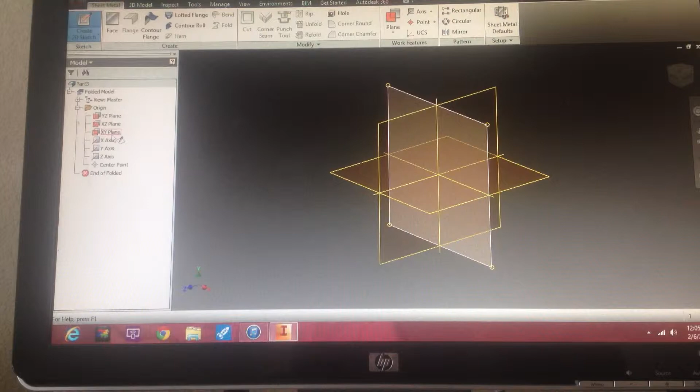Click on sheet metal. We're going to create a sketch. We're going to create a 2D sketch. I'm going to make it on this plane. There's the YZ plane, the XZ plane, and then the XY plane. So I'm going to pick the XY plane, so we'll be looking like what the front view would be.

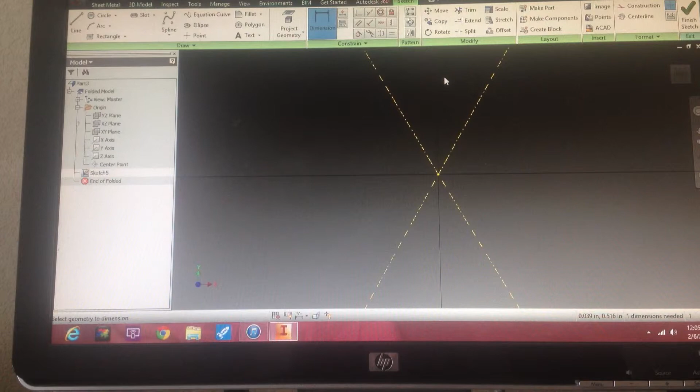I'm going to start with a rectangle. Come in and grab this one that has the center point for the rectangle. Now it's constrained to the center, and whenever you see these green lines, we need to make them look blue. So I'm going to make a part that is 36. And then as you can see, it kind of expanded both of them relative to what that size was. I'm going to make a 36 by 36 starting piece. You can come over here and click on that dimension so it'll pick it up.

A lot of things you can do with this right now. I'm going to just try to go through and show a quick basic function. I'll come back with another video to do more. So we've got a 36 by 36 inch piece. We want to make it into sheet metal. So we're going to have to go to the face command.

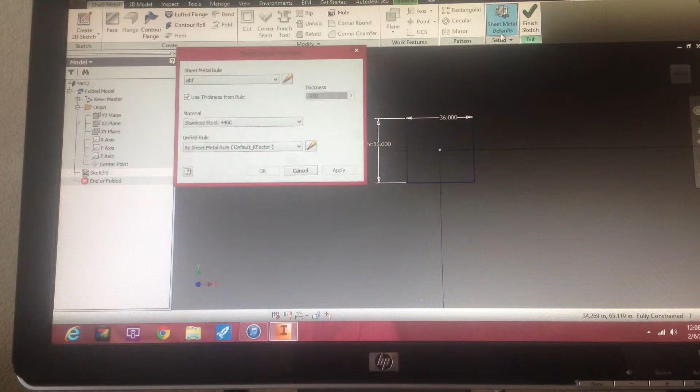Your sheet metal defaults here will let you change the different thicknesses. Right now we're going to use .059, 16 gauge stainless steel. So I'm going to put the face command. It knows that's the only place it could go. Apply. So now we basically have the base part of our sheet metal component.

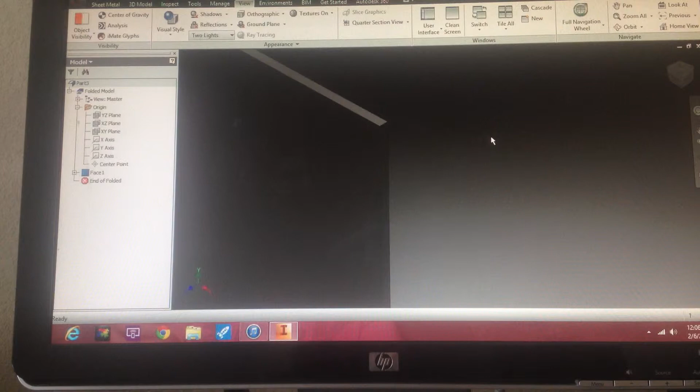One of the things I like to try to do is in the view here, go to visual styles, take the shaded with edges. You can kind of see the part a little bit better. The guy who taught me how to do this, Clint, kind of gave me that idea.

So the next part I want to do is I want to have 3-inch flanges coming up all the way around. So we're going to go into the flange command, and you can grab either side of it. You can grab the back side, the flange will go down, or the top side, the flange will come up. We want to come up towards us. So I'm going to grab the top part. I want to come in here and make this 3 inches.

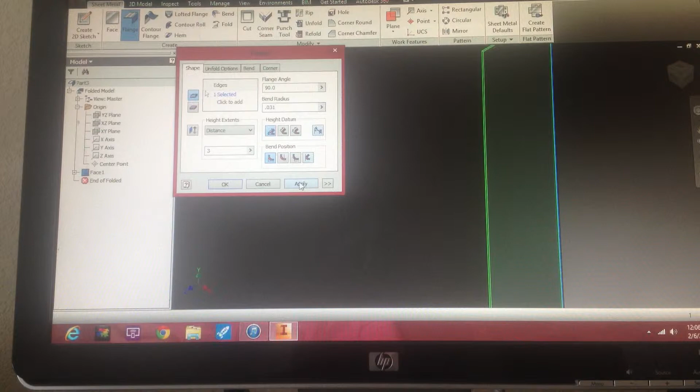And the bend radius, that's something that's up to your shop. I'm going to use a 1/32 radius. There's other functions that are inside of here. One of the things that's most important is in the corner. We'll see right now why this will become important, because we want to make nice, sharp, tight corners. So we've picked that. So now I'm going to pick this one too.

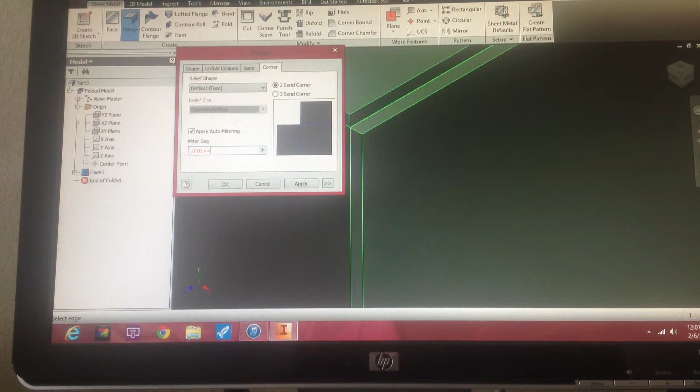So they've come up right here, and as you can see right now, I'm trying to get in here with a really nice, tight corner. So we're going to take a 0.001 gap size. We're going to select all 3 sides, then do apply. So again, if we come in here, you can see nice, tight corners, good for welding.

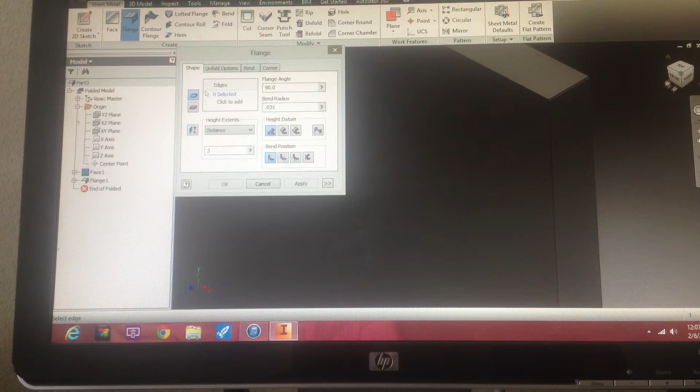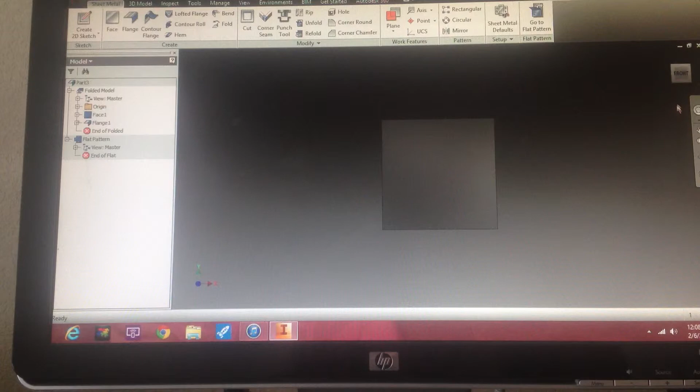I'm going to go and make a flat of the part. So we're going to come to our front view and make a flat pattern, and you can see nice tight corners, good for the welders and the brake guy. Go back to the folded part. I kind of like to look at it, for you guys to see it, in this kind of 3D isometric view.

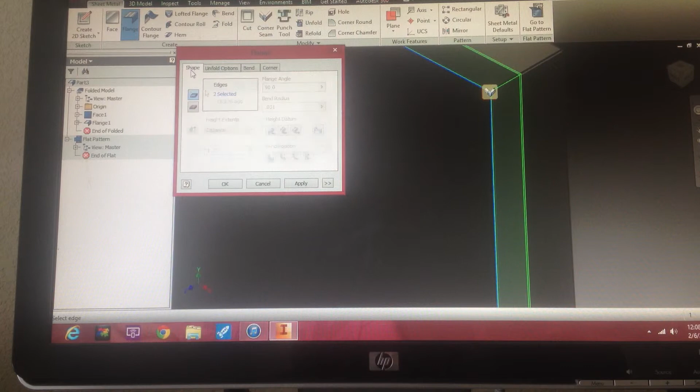Now I'm going to go and I'm going to put some flanges around the outside. I'm going to put 1.250 flanges. And now this time I'm going to have them bend towards us. Go select edges. And as you can see, we have this command, which is very important to have it on, apply auto mitering. So it's come up with a nice, good bend right there. And we'll do apply.

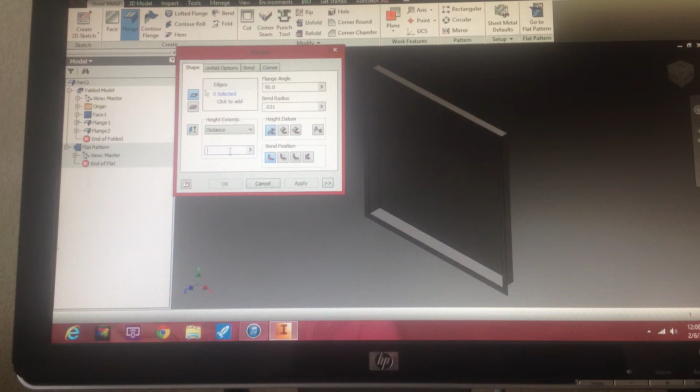And then the last part of this box that we're going to have is we're going to have a return flange on the outside. We're going to make it a 1/2 inch return flange. So I'm going to pick the far side. So if I pick the top, it would come up towards us. I'm going to pick the bottom, so it'll go away from us.

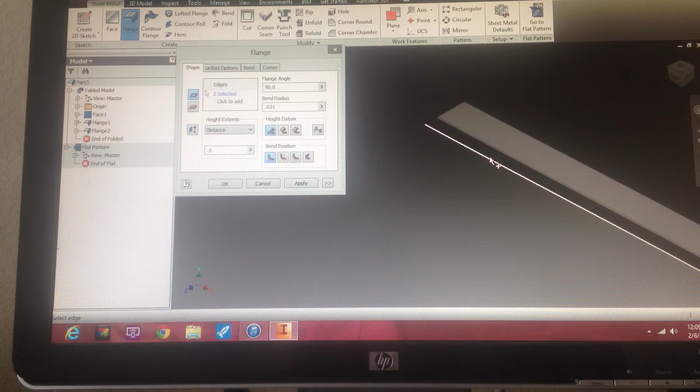And when you're looking here, you don't really have to rotate it around. You can kind of see how the white line goes. Here it's on the top. There it's on the bottom. Top, bottom. And if you guys are picking up on that little part right there. Let me zoom in a little bit more. So top, bottom. Say apply.

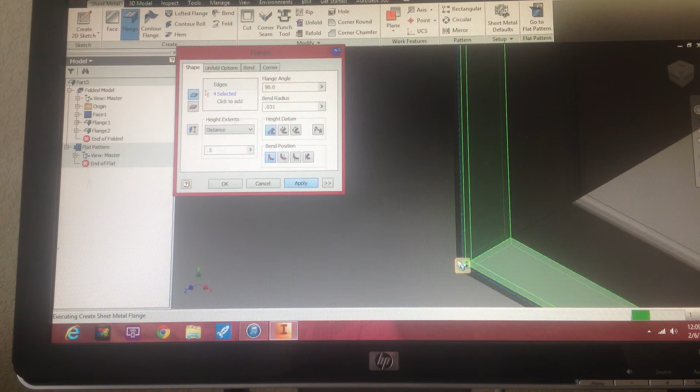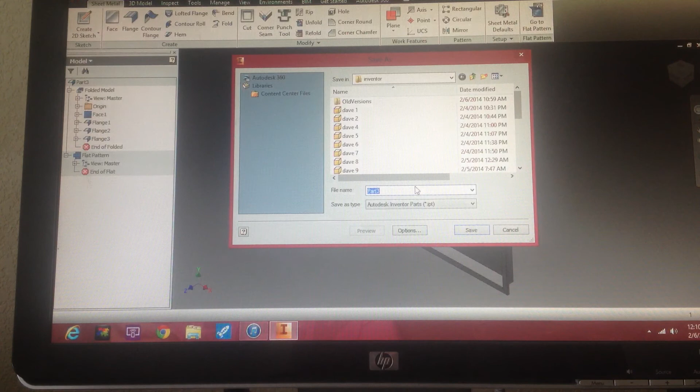And so we basically have a panel that would have a box bottom to it with the return flange at the top. We'll go to the flat pattern. See how the notching comes out very nice, good, sharp parts. And we'll save it. And we'll do the drawing next.